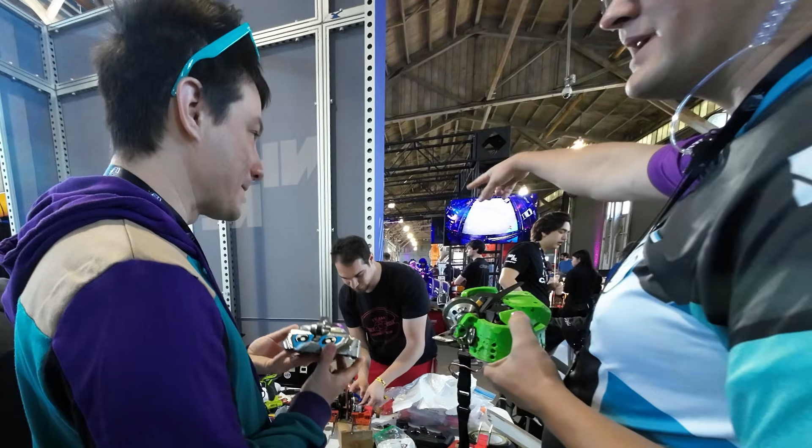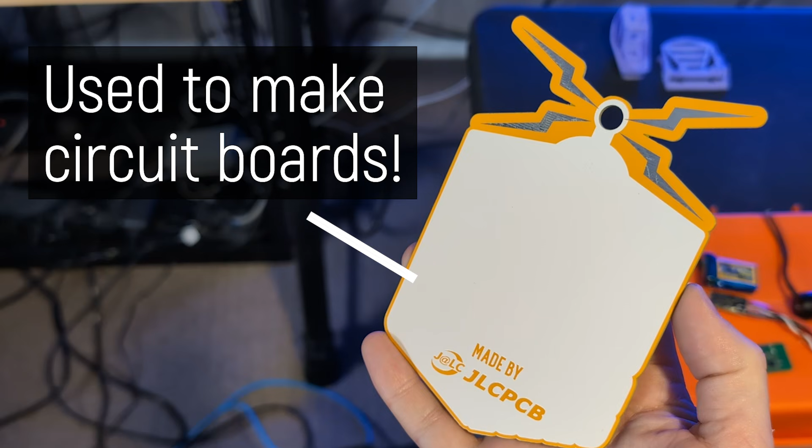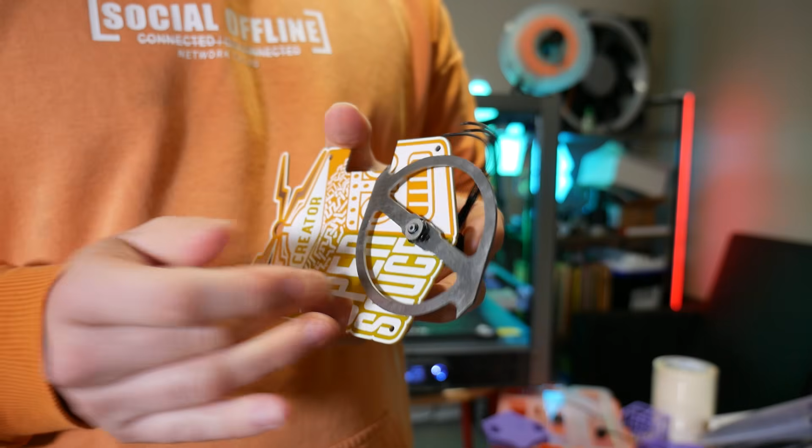Last year I attended Open Sauce in San Francisco. It was an absolutely crazy time. I met heaps of you guys in person, saw amazing crazy projects from people all around the world, and met other fellow creators in the space. And as part of that event, we all got given these. Now these are attendee badges, and these are actually made from PCB material, usually used to make circuit boards. Now I was just playing around with some combat robot parts on my desk with the badge nearby, and it clicked. This is the perfect size to use as a base plate for an Antweight combat robot. So let's turn the Open Sauce badge into a destructive combat robot and fight it to the death. Let's get started.

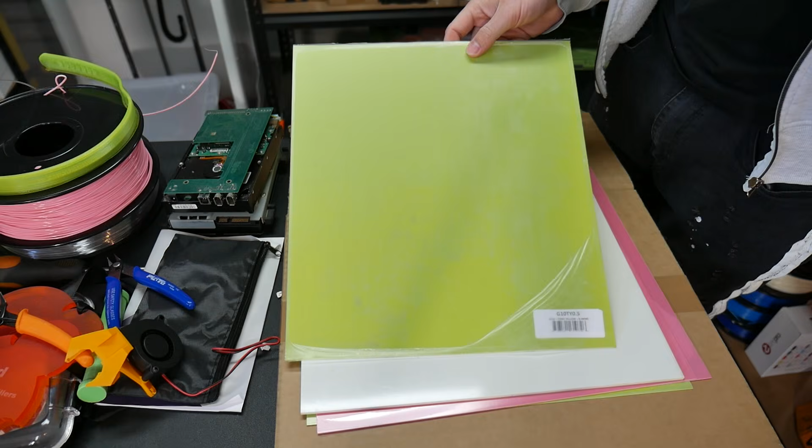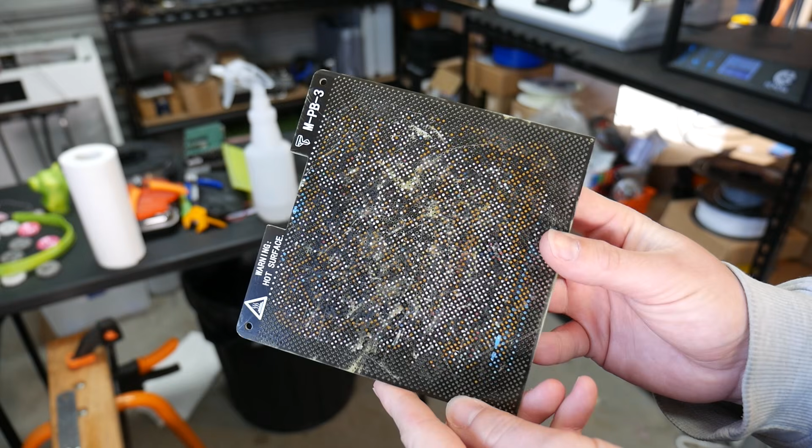So let's go back to this badge. What is it, and why could this be suitable for a combat robot? Well, PCB material is actually a type of fiberglass composite. And I've shown this sort of material on the channel before, but for a very different purpose. Some of you may remember years ago, I showed that you can use Garolite or G10, which is a fiberglass composite sheet, as a really effective 3D printing surface. This material is really versatile. It's very stiff, very lightweight for the stiffness and the strength, and also it's non-conductive and resists high temperatures. It's actually very difficult to even set fire to, which makes it fantastic for PCBs, but also very good for combat robot applications.

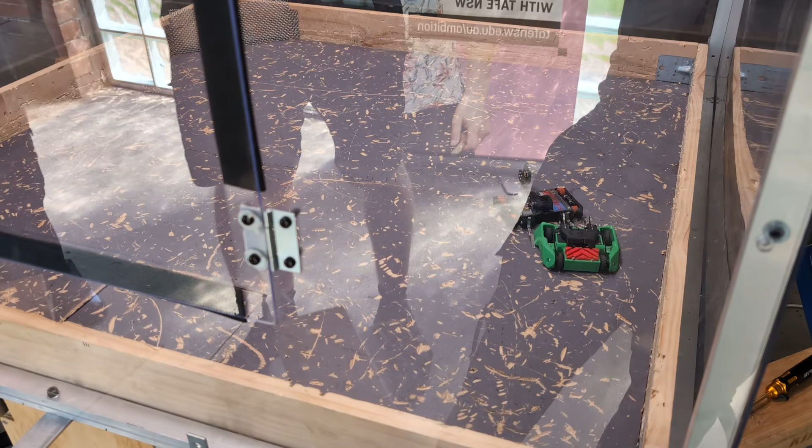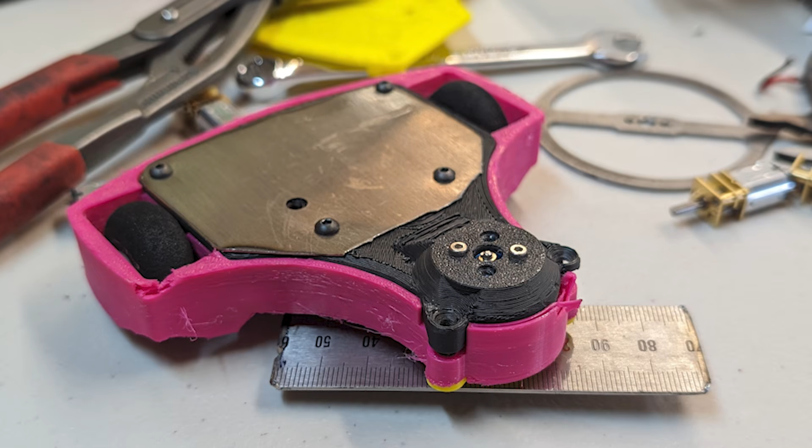And this badge just happens to be the perfect size for an Antweight combat robot. Here in Australia, our Antweights weigh 150 grams. That's it. Literally the palm of your hand. Some of you may have seen this robot, which is Pancake. This is the latest version that's been refined down, and it's got a TPU frame, so it's all flexible and resilient, with this huge undercutting bar. This whole thing weighs 150 grams. That's it, and it's hugely destructive. And I really like the undercutter concept of Pancake, so can I take that idea and use this badge as the base plate? Well, let's find out.

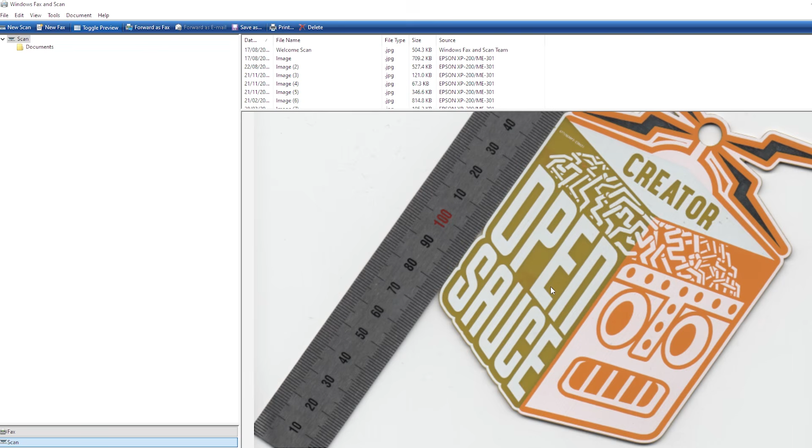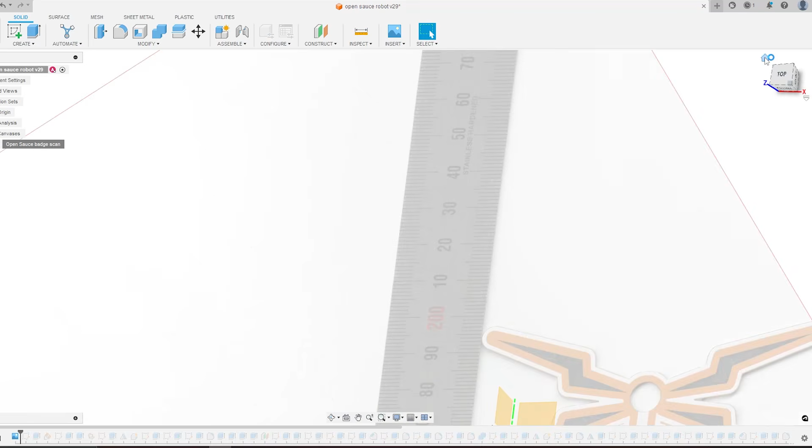And the first step is to translate this real-world object into a reference in the 3D modeling software that we can then use to start our model. My favorite way to do that accurately is just to get a flatbed scanner, put the object in, then put a ruler next to it and scan the image. Putting the ruler next to the object is critical because when you bring this image into your software, it will be flat, but it won't be to scale. So what you need to do, for example in Fusion, is choose 2 points of that ruler and assign a value, which is the exact measurement of what it should be, and it will scale the image perfectly, giving you an almost identical one-to-one reference of what you're actually trying to recreate in the digital space.

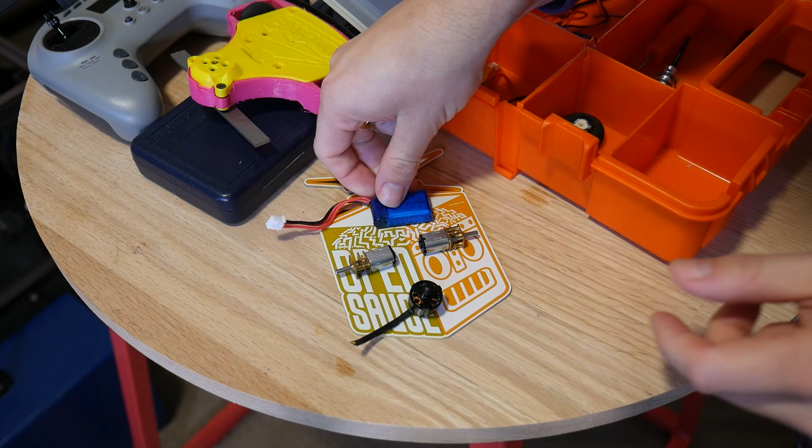From here, I like to grab all the parts I've got, have them on the table with me with a pair of calipers, and measure those parts and put them into the model using a sketch. Often I'll use the first sketch with construction lines to just mock out where I want the parts - for example, where the battery bay will be, where the electronics will go, where the motor's gonna go.

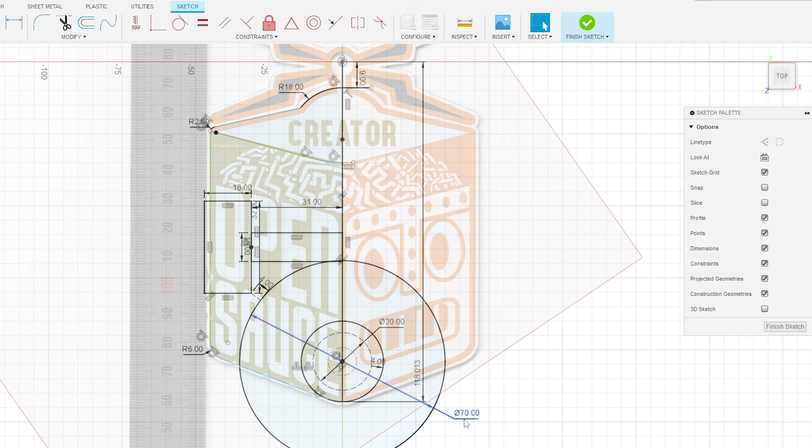I like to make sure I draw a circle for the blade's actual circumference - as it's rotating, will it hit where the wheels are gonna go? Stuff like that. I tend to do this using a lot of constraints to make sure that as I change things, the model can update accordingly, and I can make sure I have it as efficient as possible.

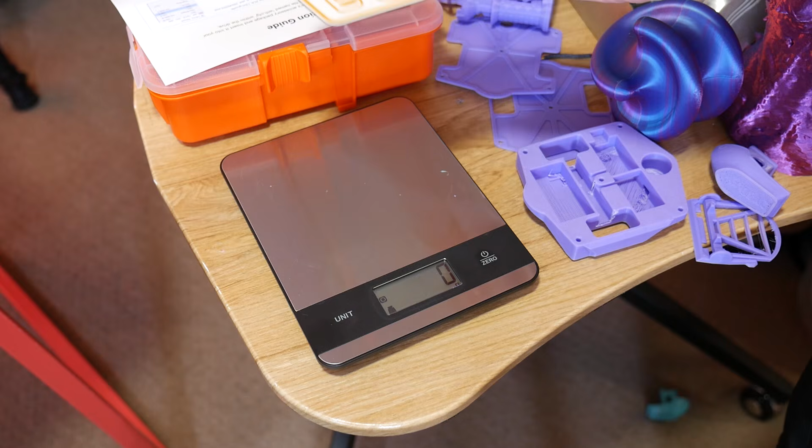Which takes us to the badge. Now, this material is quite lightweight, but still it's quite a substantial amount of our 150 gram budget. So what I decided to do is design in these pockets that take away material while leaving these edges to make sure the part was still quite stiff and resilient.

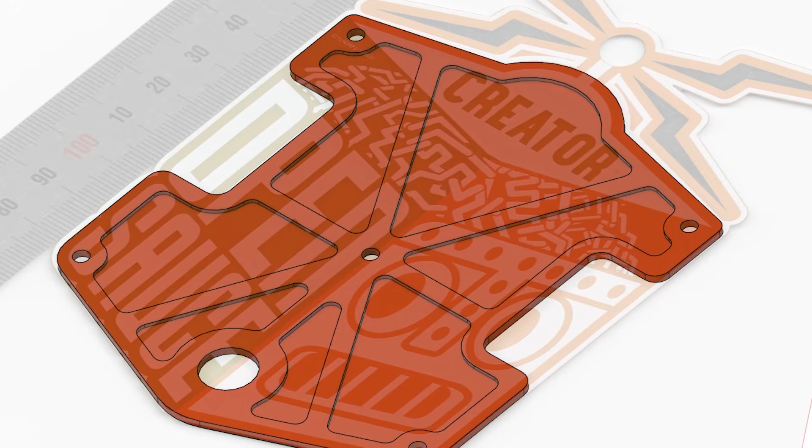And for the weapon, I'm going for this undercutter style design like Pancake has, but using a small motor. To support that motor, I'm actually putting a bearing on the output shaft, which should, in theory, absorb a lot of the impacts as it hits things at speed.

So the thing is, I can't 3D print any of that. I can't do that by hand. That is a job for CNC.

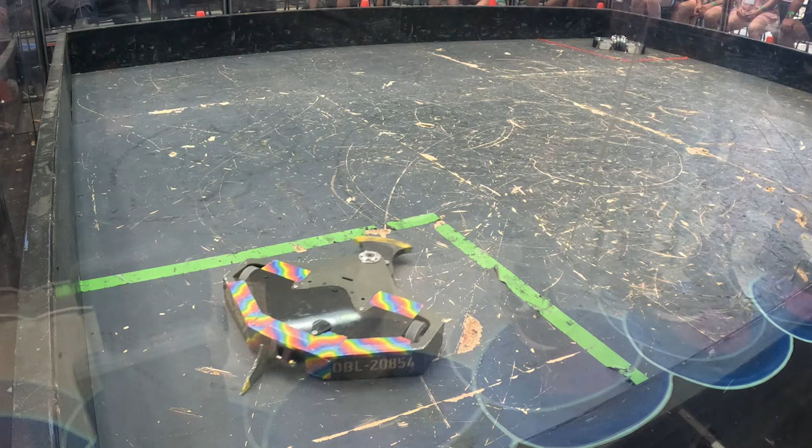But it just so happens I know another robot builder who also has his own YouTube channel who has a fantastic Tormach CNC, and he's known as James from Broken Link Robotics. You may have seen some of his creations on the channel before, like when he beat my robot into submission and my robot caught fire.

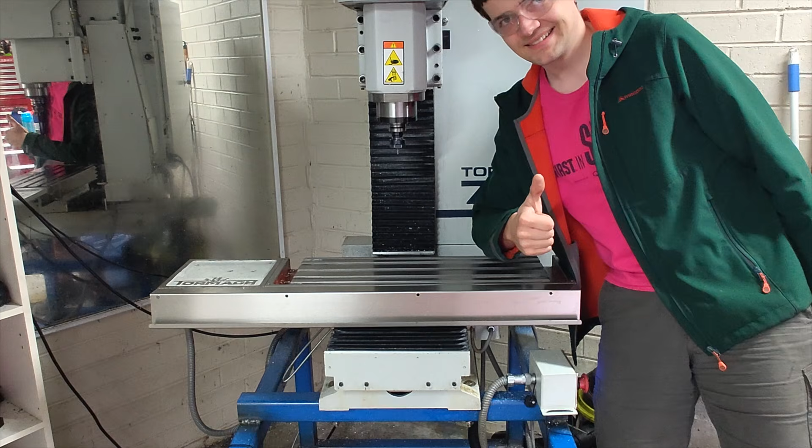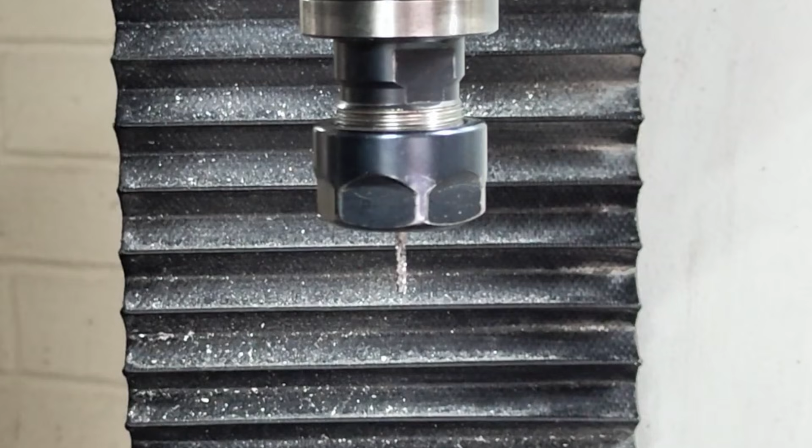If you're unfamiliar, one can think of a CNC mill as a very heavy, powerful, reverse 3D printer. It's got 3 axes of movement driven by some chunky stepper motors, and a spinning tool spindle that can hit just over 10,000 RPM. While being more suited for heavier metal jobs, today it's handling finer operations using an end mill designed for cutting PCBs.

Normally an entire part will be cut out of some larger stock, but as we're modifying an existing part, there are things to consider.

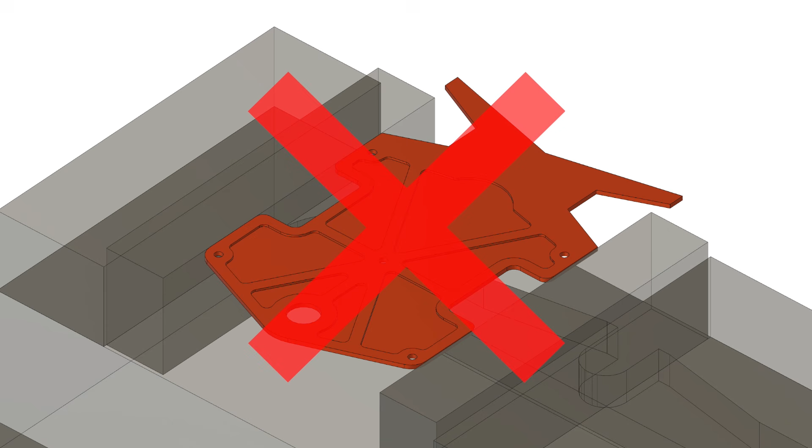Firstly, we can't hold the badge down with clamps or the vise, as we need access to the whole face and sides. Thankfully, the final part needs 5 bolt holes, which can be leveraged here.

Firstly, a 3D printed PLA block will snugly hold the badge to drill these holes. Then a second block will fixture the part for the rest of the operations.

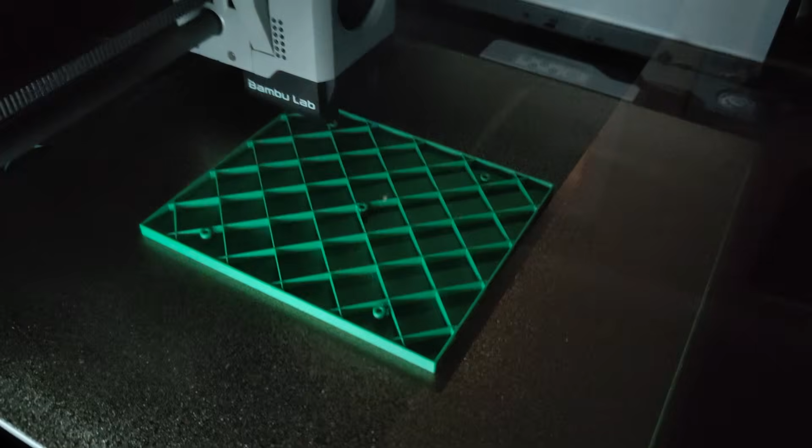Unlike a 3D printer, we need to confidently know where the existing stock is in space. For this, we're using a very accurate CMM probe.

It's worth mentioning that the way the probe detects things, it actually deflects when it hits stuff. It's sprung loaded and it's got 3 load cells in there that can detect the slightest touch, and that's how you know when it's bounced off of a part.

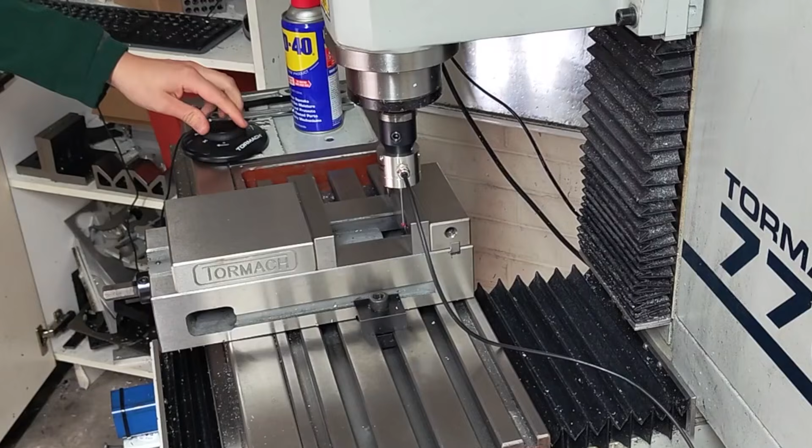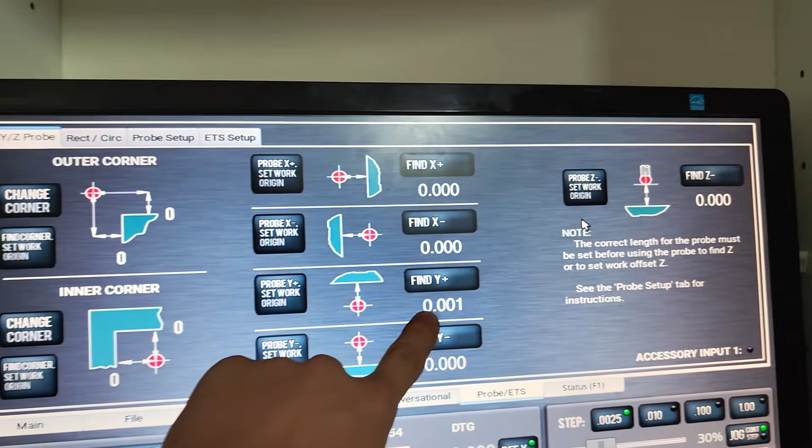Moving the machine around, the probe is touched against 2 far apart sides of the vise to align it with the horizontal machine axis. This is definitely below the actual accuracy of the probe, but we are allegedly within 0.001 millimeters from this point to this point in this axis, which I think is pretty good.

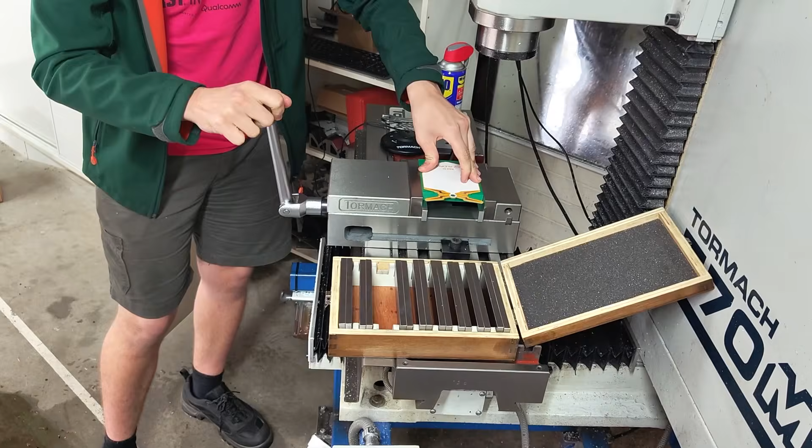The Operation 1 printed block is next clamped in the vise, and the probe used again to find the left-hand center of the part. This is the reference point that the G-code instructions are based around, and any and all deviation in this measured location will be translated directly into our machined part.

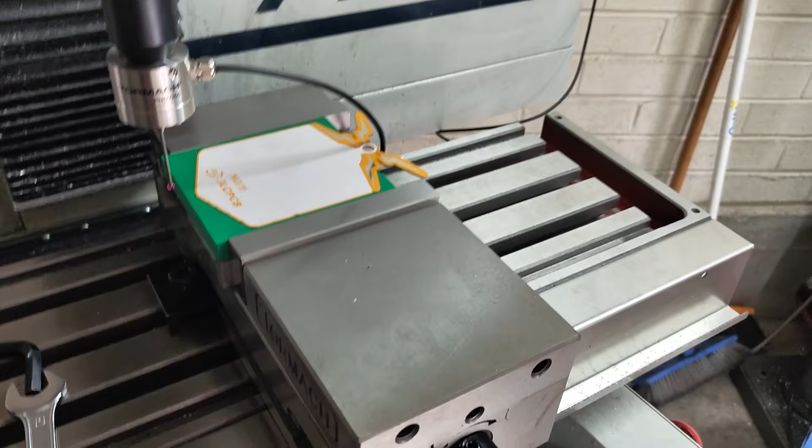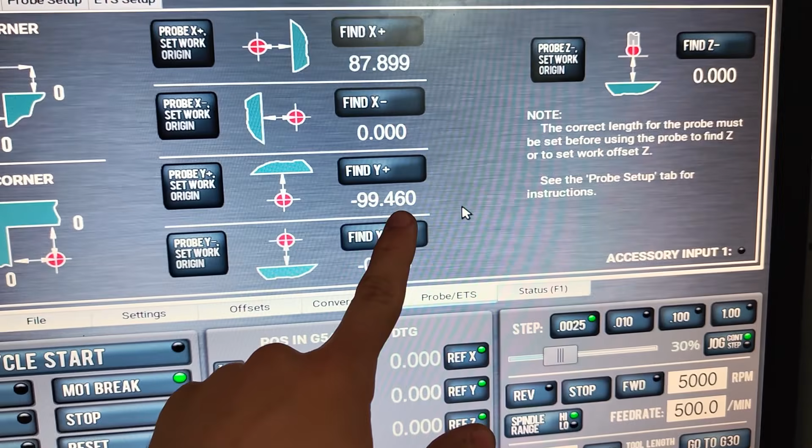So what we've gone and done is we touched the probe off on this side of the part and on this side of the part, and taken the difference between those. That difference is 99.46 millimeters, and half of that is roughly 49.73. So if we tell the machine that's where the middle of our part is, we'll be able to start machining. This is meant to be 100 millimeters when it was printed, but you can see how there's actually quite a difference between.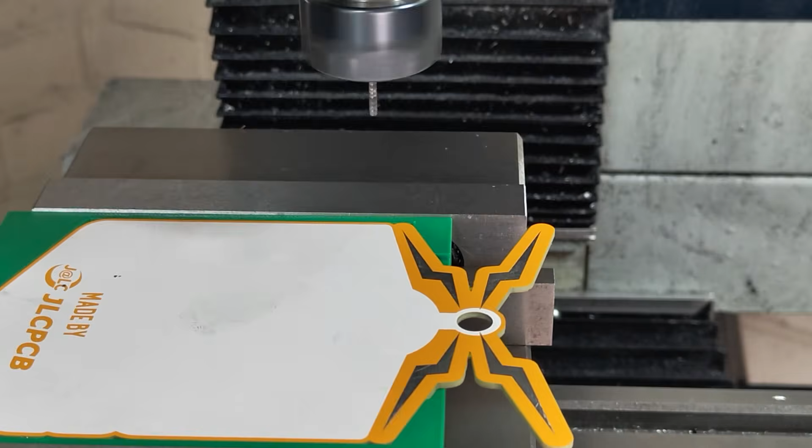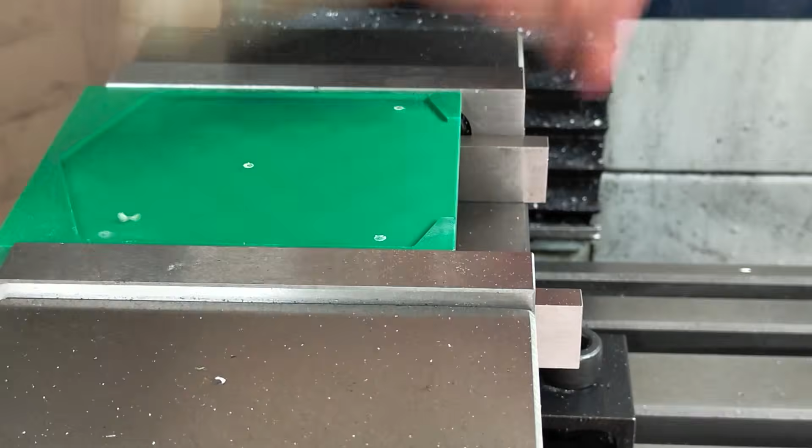Look at that, it actually turned out really good. Alright, on to the next step.

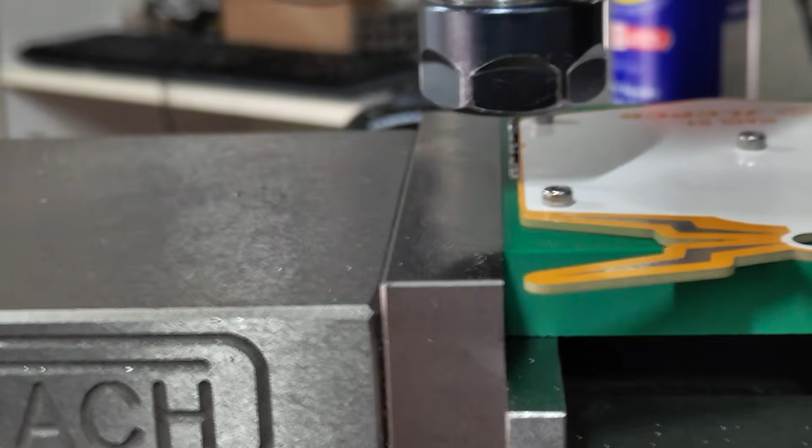The holes appeared to be in the right location, so the part is mounted to Operation Block 2 for the final machining. This block is dialed into the machine much like the previous one, but reprobed due to the difference in dimensions. You can see the tool, this is as far out as it goes, it's just between that gap between the vise jaw and the part, and that's where it will come down before it starts that contour, which you'll see when it cuts.

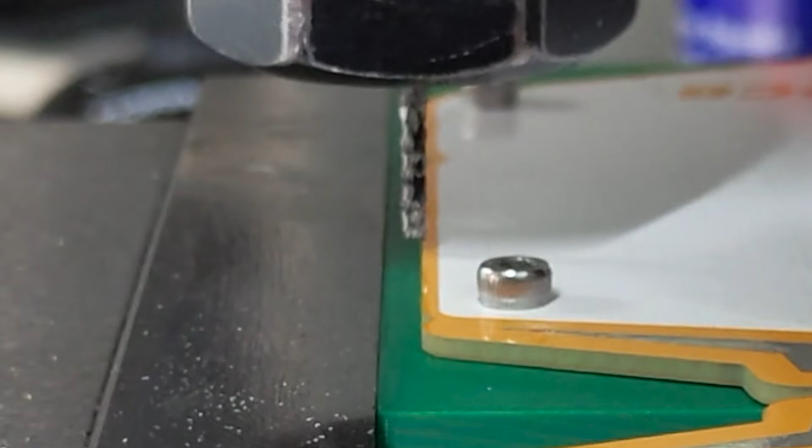If the tool touches the vise, it will definitely just explode, so it's very critical to get that gap correct, not fly too close to the sun, but still give it the room that it needs to move.

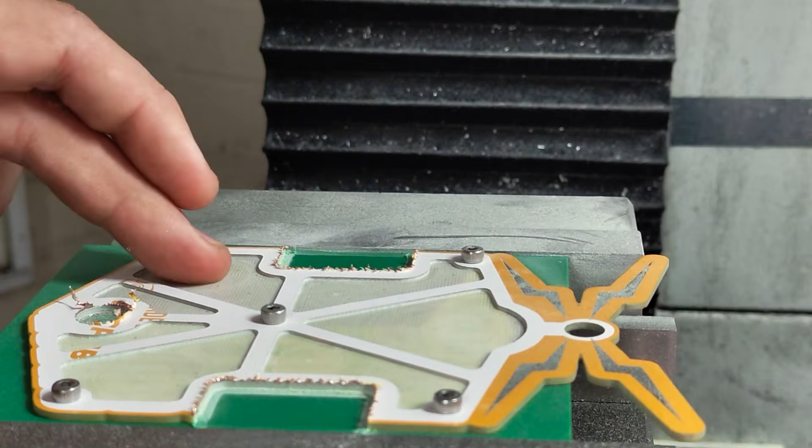You know what, that turned out pretty damn good. Got no idea why these burred up. Well, these pockets look absolutely immaculate. But anyway, as long as the customer never sees this footage, I guess.

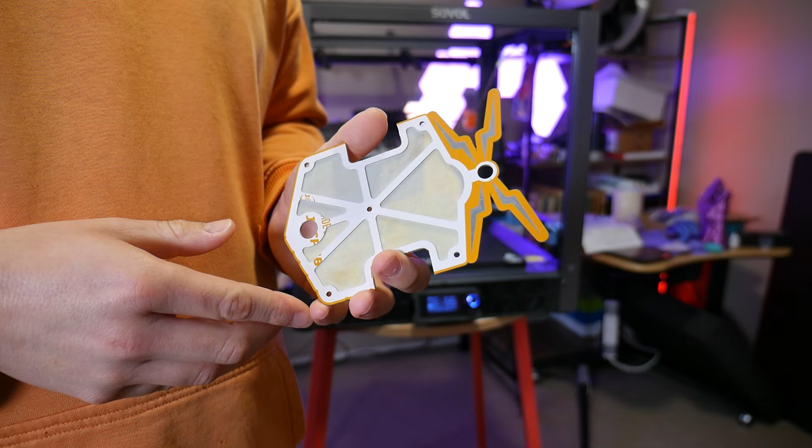Well, thanks for that, James. It looks spectacular. It's really, really cool how much weight it actually saves machining those pockets out of this badge. It's quite substantial, and again, every gram counts when you're working at such small weight classes.

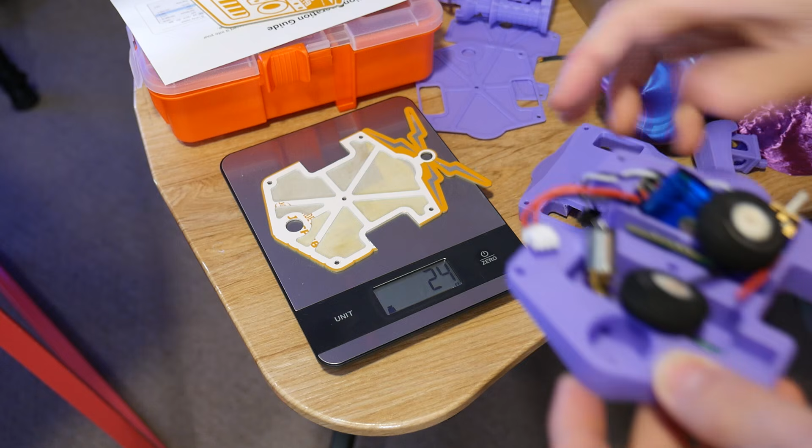The way I like to prototype is to get a design pretty much done, but not spend too much time fussing over small details, and then send it to the printer, because I know the first version most likely will have problems, and of course they did. Just small things where the wires weren't routed properly, or the motors didn't quite fit correctly. Then I went back to the drawing board a few times.

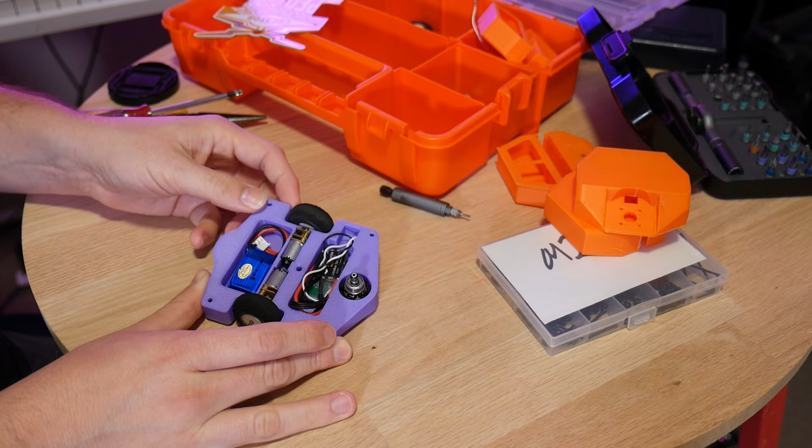When I was happy with my design, I wanted to print it with a cool looking name for the robot. Now, Fusion isn't very good for doing complex typography and logos and designs and that sort of thing, but it can import an SVG and use that as geometry to then create details on your model.

So to create that detail, I used a program called Affinity Designer. This is part of the Affinity suite from Serif, and if you've used Adobe software, then I would highly recommend checking out these programs, because you buy them once and you're done, and I am so happy with them. So I use Designer, which is like Illustrator, and I use Publisher, which is like InDesign, and they work fantastic.

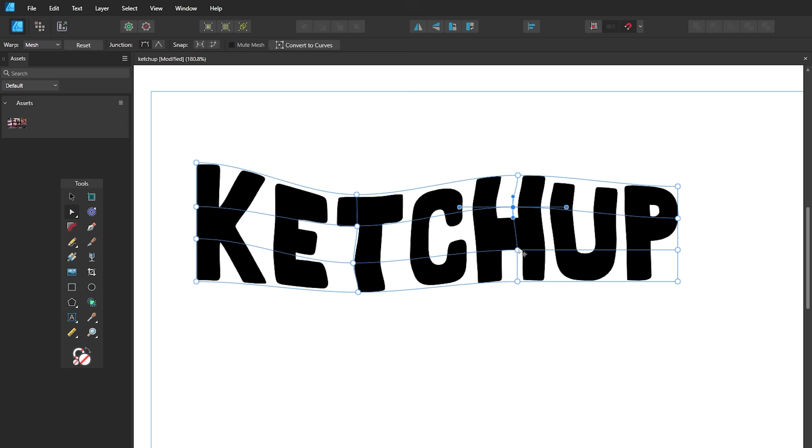So for this robot, because Open Sauce is a play on the word, I decided to call him Ketchup, and this is what I came up with.

Once I'm happy with this design, I brought it back into Fusion as an SVG, punched it out of the top of the model, and from here, I really wanted the text to stand out, because if you just print it in one color, well, you won't really see it, will you?

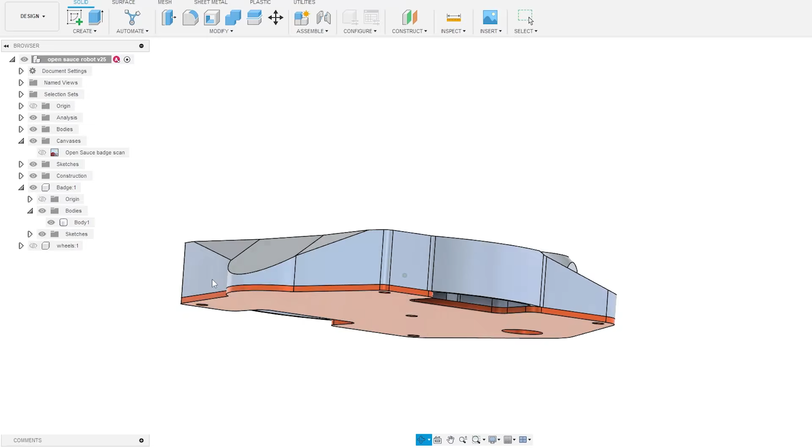So I brought it into Bambu Studio, and I used the painting tool to then print this part multicolor on the A1 Mini. And this was the result.

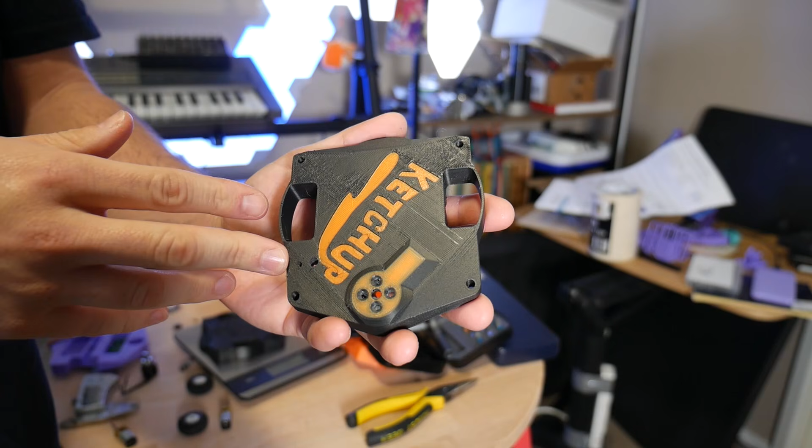Now, granted, it's pretty stringy. We've just had two solid weeks of torrential rain and literal floods, so even PLA is stringy at the moment, but I think this looks really cool. The text stands out fantastically, and most importantly, all the parts fit, or at least seem to.

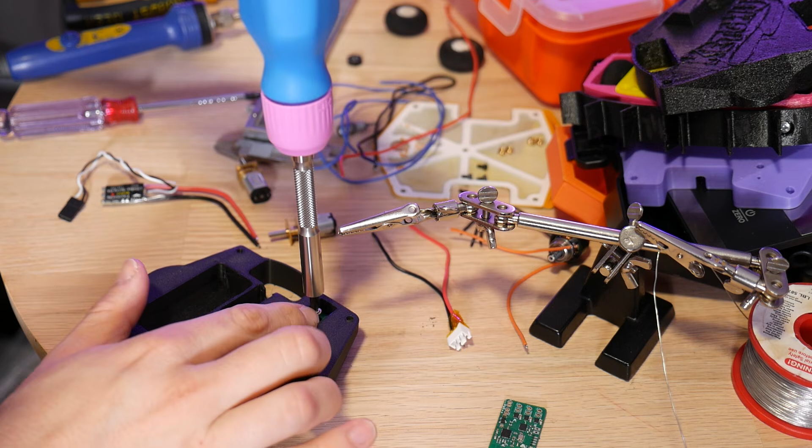So now we get to the most fun stage of making Antweight combat robots: the wiring. Yes, as you can imagine, it's as fiddly as it looks.

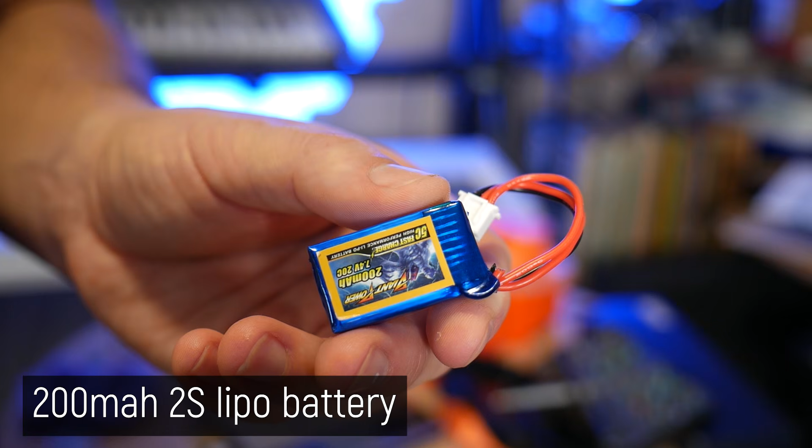Now to get these machines moving, you need a few key components. You need a battery to provide power, you need a speed controller, and you need a receiver, or in this case, I'm actually using an all-in-one unit called a Malenki Nano. So this actually has the receiver built into it, and 2 drive channels, and 2 outputs for your weapon, because in this case, I'm using a brushless outrunner.

I have a brushless ESC to run that motor. Now, it's only a few parts, but all of these have to be joined together with wires, and routing these wires is an art in itself. I use a fine-tip soldering iron to solder them in place, and I always make sure I plan very carefully how long each wire is, because wires can add up in weight and take up space.

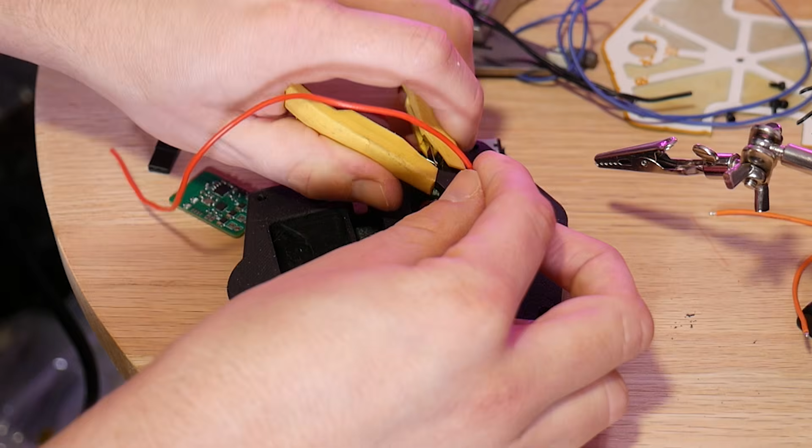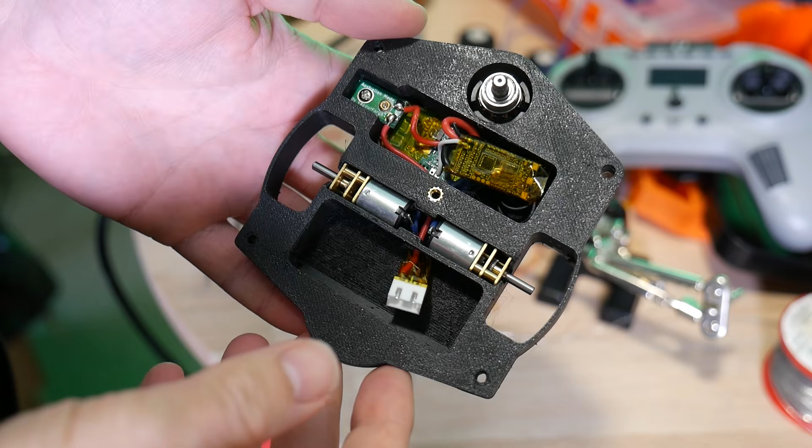So in tiny little robots like this, you need to measure them precisely, so there's a little bit of wiggle room, not too tight where they might break. I tried to film as much of this as I could, but soldering these tiny little things is such a fine art that I just put on some chill music and went to town, and I ended up with this, which is possibly the cleanest wiring job I've done to date on an Antweight robot.

But it's still fairly serviceable if I need to replace things like the drive motors or weapon motor. And that's the thing, because they will be destroyed. It's a combat robot - they break each other. But either way, I'm very happy with the result.

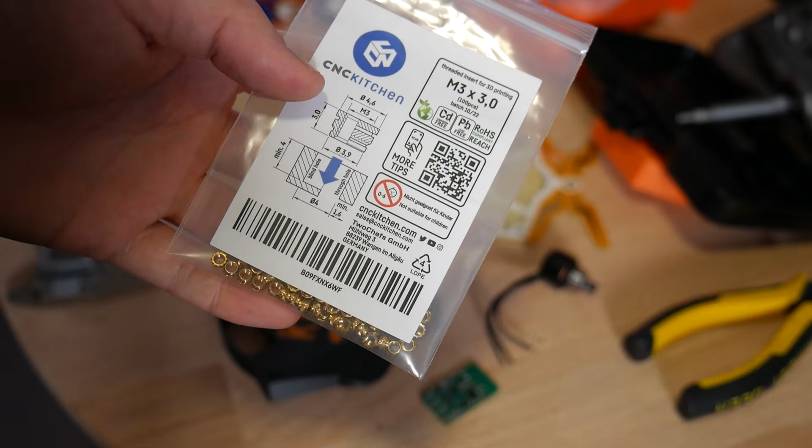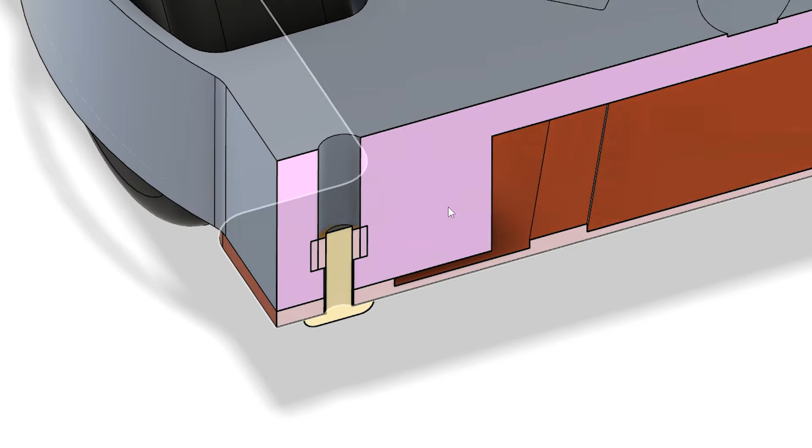To hold the base plate in, I used threaded inserts, and they just pushed into place. A little trick I learned from a few other builders - if you put the threaded inserts in from the other side instead of from the side facing the part you're fastening to, they would have to pull out through the material, making them a lot stronger instead of just pulling out like they normally would. Now, this is a great tip and awesome if you can pull it off, but in my case...

...the bore for the insert was so deep that the insert tool was actually too large, melting plastic around it as I forced the insert down into place. So that's something I didn't really consider. It's much stronger to do it this way, but then you have to have access to putting the insert in from that direction. So yeah, even though I've built countless machines like this, I'm still learning all the time.

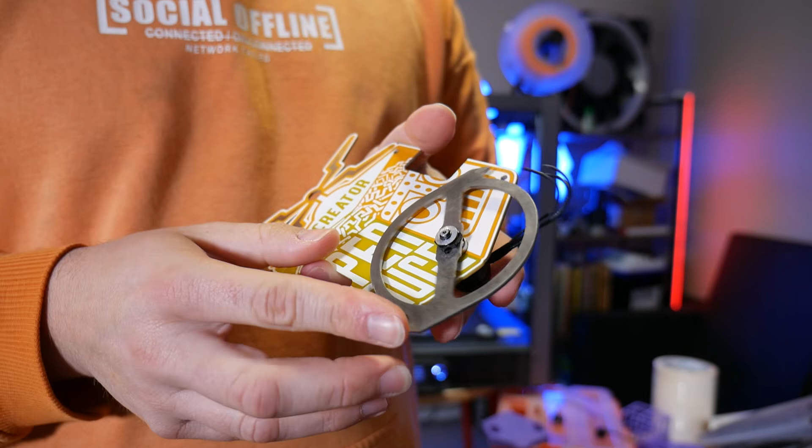For the blade, I used this disc that I originally had on Pancake, and James had cut this out for me previously from an old saw blade. So it's like a high carbon steel - I have no idea what kind it is, but it's actually held up pretty well and seems fairly resilient.

But most importantly, it's very thin, so it cuts right through other robots. Even robots made out of TPU - people have found out how durable and resilient TPU actually is in terms of taking blows and keeping the machines going - but thin blades cut right through it and can be a real game changer in terms of hitting components inside that TPU frame. So because most people build robots out of TPU these days, I tend to run the thin blades because it cuts right through it.

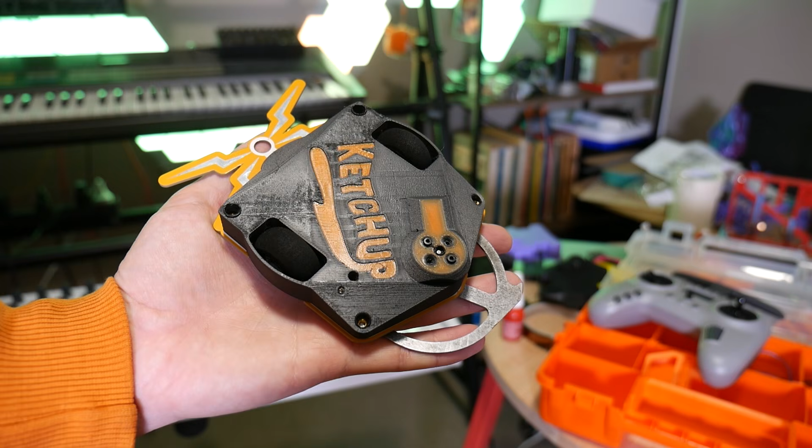And then after lots of finessing, here we have it. This is Ketchup, my Antweight combat robot made on the open source badge. I just love the aesthetics of it - the badge looks so cool with the typography, the colors and everything - and now it's got a blade sticking out the front of it. I just think it looks so cool.

What's really surprising to me is how well this robot drives. Having the weight distributed properly so the wheels are actually between the battery and the weapon motor means it drives much better than machines I've built in the past, where all the weight's at the front and the wheels are at the back. It's a lot easier to control, and it's actually really zippy as well.

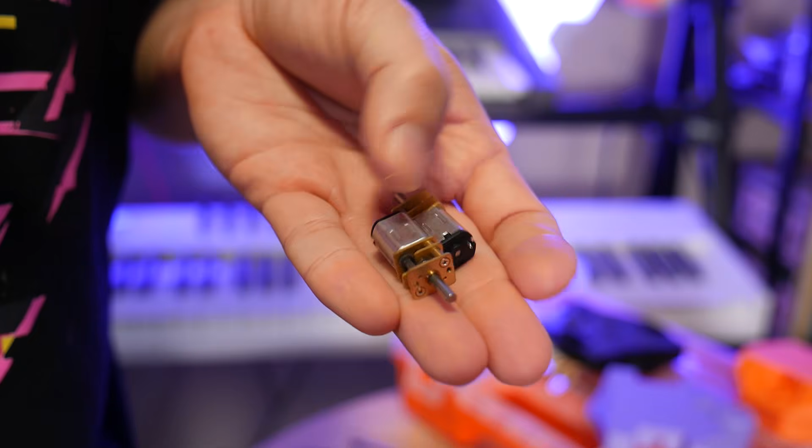The N20 gear motors I've used are really fast. I don't know how well they'll last, but they have a lot of speed to them, which is all you really need for a spinner, because I'm not trying to push people around.

So I've built this really cool robot, but what's the point in just building a machine and not using it? So I invited James over with his own Antweight combat robot that he's built to have a few grudge matches. And this is how it went.

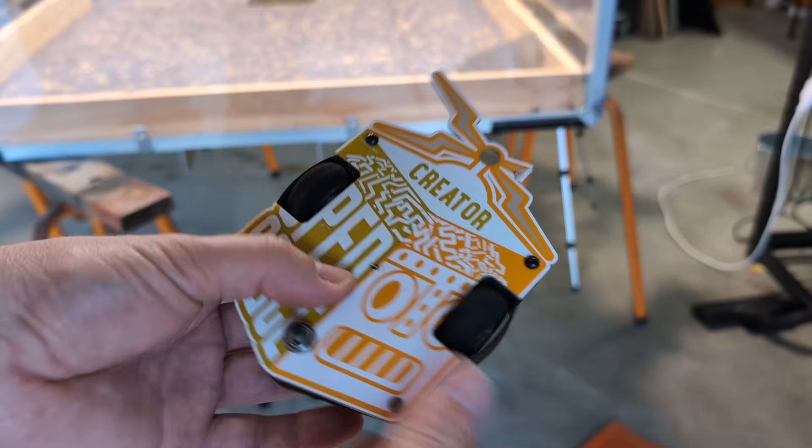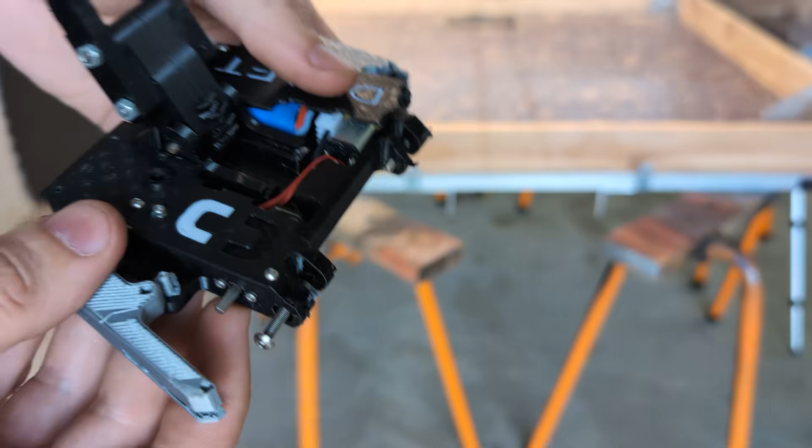After our grudge matches, as you'd probably imagine, Ketchup is pretty worse for wear, but much less than I expected. The same can be said for James's robots, however. For his lifter, it did suffer some catastrophic damage with the weapon blade reaching in and getting some drive components. The armor pods on the side also got destroyed, but they were intentionally made from very thin-walled PLA because it looks really cool when it blows up in slow-mo.

And this robot, I think with TPU or even some titanium side armor, would be really durable and difficult to beat, even with a powerful spinner, because in our arena, the pit opens at the last minute, and so many machines get pushed down that pit no matter how destructive they are.

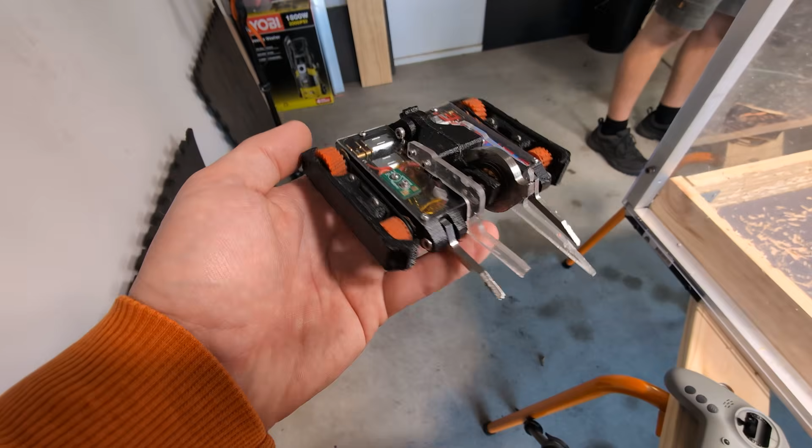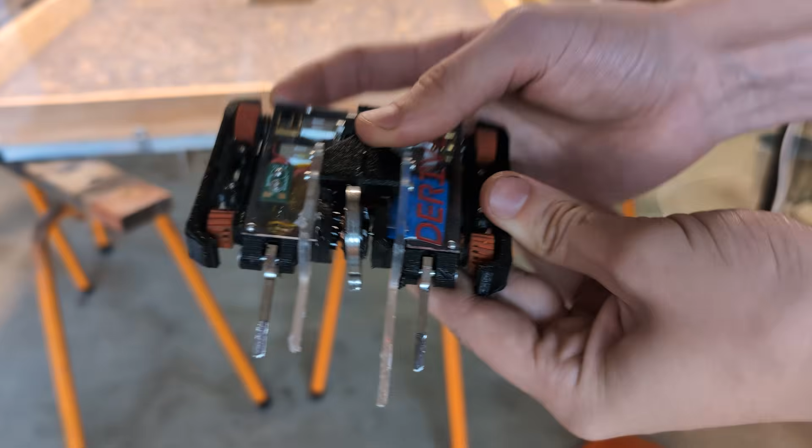James's other robot, with the lifter and vertical spinner, took this massive hit from the weapon blade on Ketchup, and you see it just hooked into the side of the vertical spinner and bent it. It was tons of fun having these grudge matches, and I really appreciate James coming around. But yeah, I might owe him a few parts after that.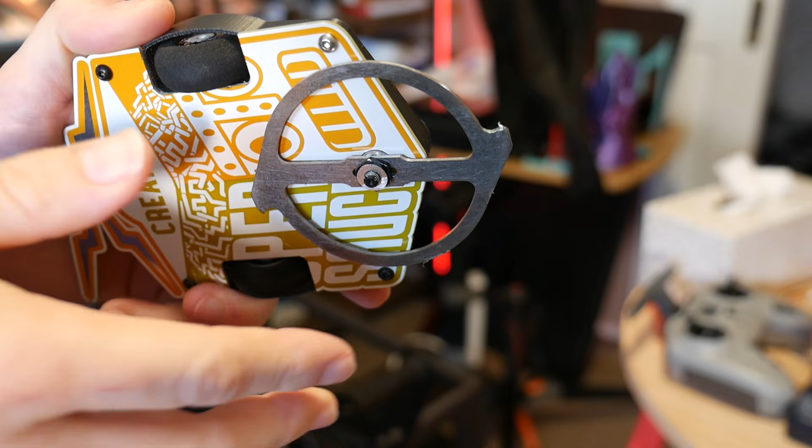This weapon motor isn't super happy anymore. The shaft is actually slightly bent, despite having the bearing, but it does still spin, which is amazing considering the forces involved and how many violent impacts it experienced. The blade as well, despite being quite thin steel, is a little bent and chewed up, but again perfectly usable. I did lose one drive motor because these N20s, I buy them cheap on AliExpress, and they are a real mixed bag.